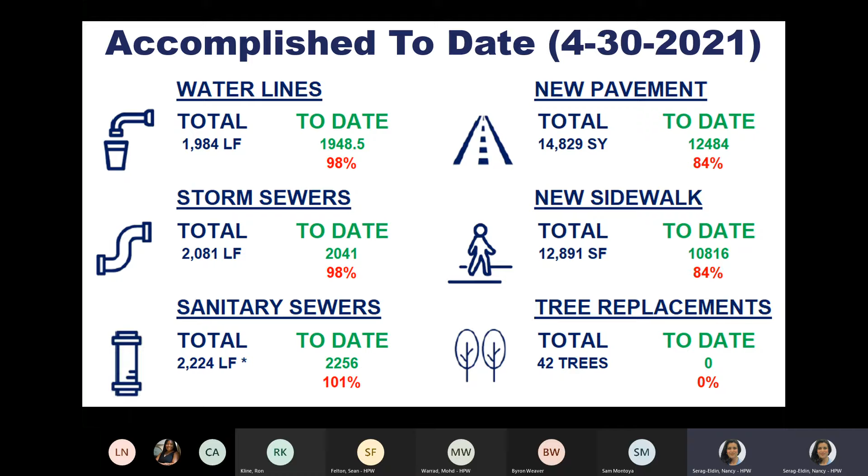As of April 30th, 98% of the water line was done, 98% of the storm sewer was done. Sanitary sewer says 101%, that's basically because we overran that pay item, but sanitary sewer I think we are done. Last weekend we installed the last bit of sanitary toward the freeway, near the crossing. New pavement, we have 84% of the new pavement complete, and 84% of the sidewalks are in, and probably next month we'll start tree replacements and sodding and such. But that's our dashboard.

Cash flow, again, big picture: to date, the total value earned is $4,972,000 out of the whole budget. That's the cumulative. And for the month of April, the value of the work that was performed was $539,000.

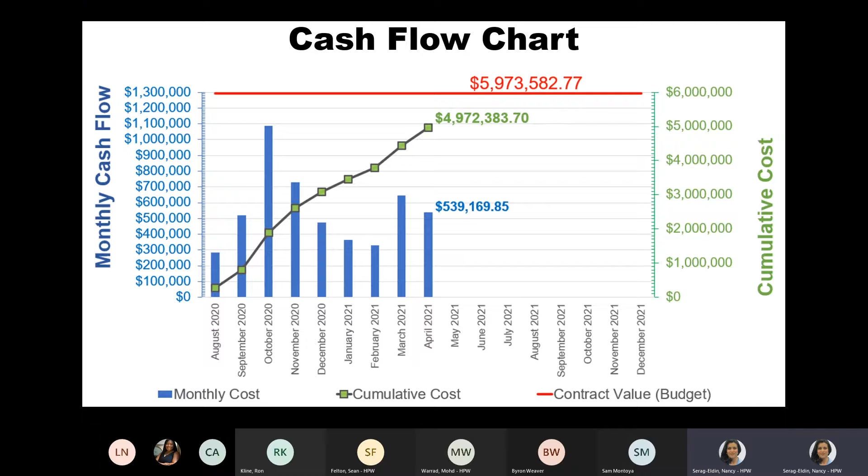In terms of schedule, our forecasted completion date is July 26th. The contractor is 123 days ahead of schedule.

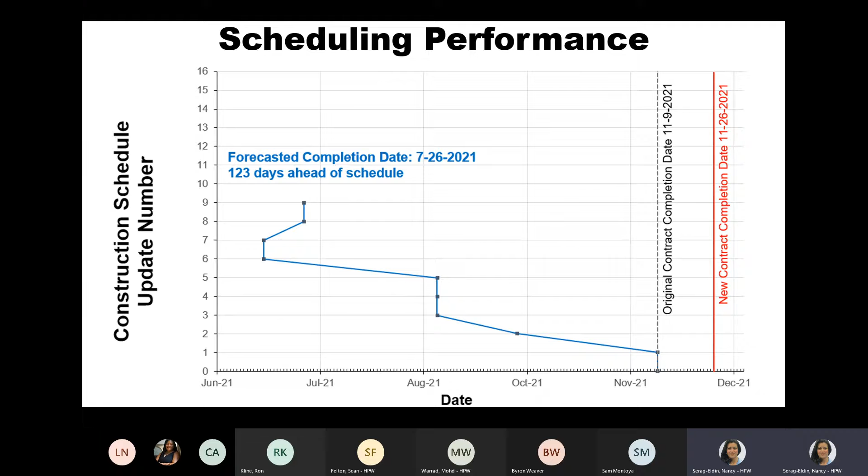We've had several change orders. The change orders listed in green have been issued, approved, and paid to the contractor, and the ones in orange are still pending. Actually, there's a few more that I need to add to this list, I just haven't sent out the RFPs yet, but I think we have 14 change orders coming or pending. Anyway, so with all the change orders that we have on the screen, the new contract amount is just over $6 million.

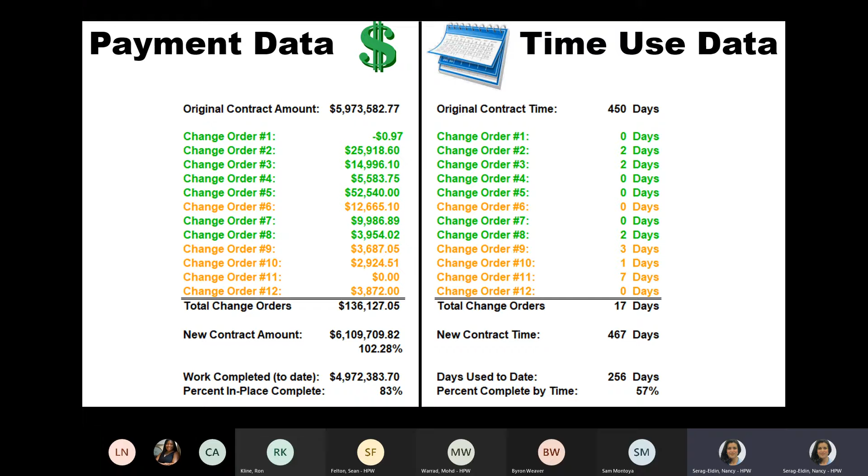If we don't deduct the pay items we're not going to use, that will come out to 102% of the budget. But when I actually did the over and under report, and deducted the things we're not going to use or the remainder of those pay items, we're actually sitting at 99% of the budget right now. So percent in place complete is 83%, percent complete by time is 57%. So good job, SER.

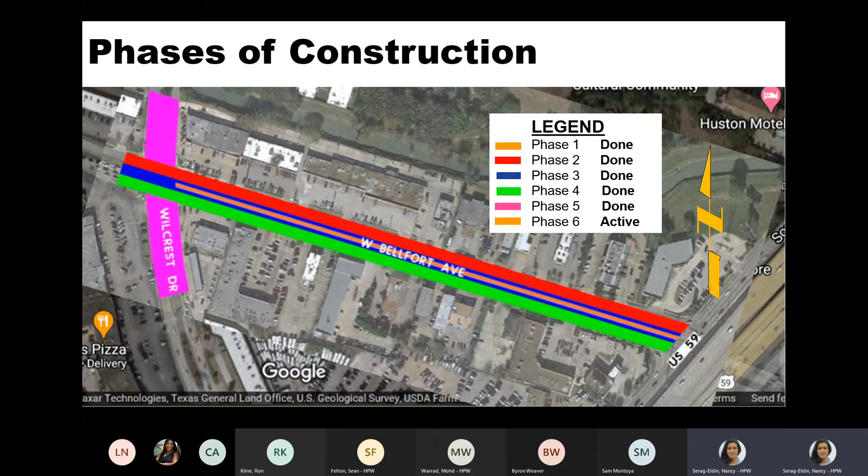Okay, here are the phases of construction. Again, all of the phases have been completed. We are now in phase 6. So here's phase 6, it jumps out at you, the median.

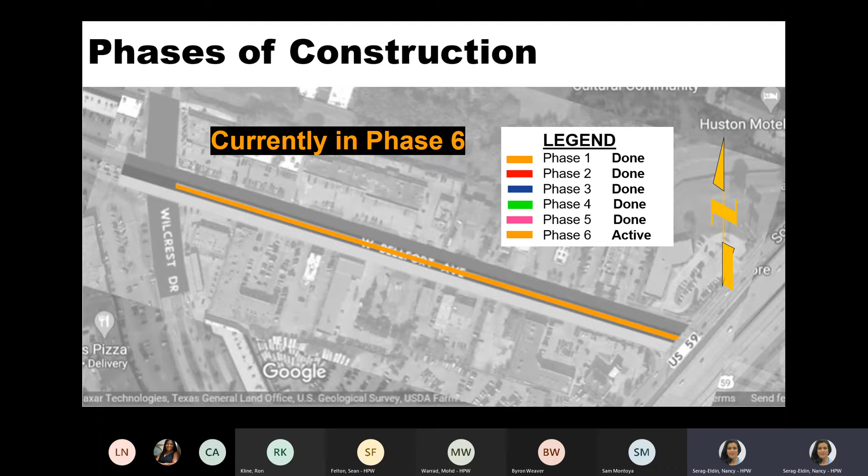Okay, so that was the progress overview. Now we can dive into the month of April specifically.

So just to review the previous action items, all the action items are done. Well, no, that's not true. Two out of 5 action items are done, and I am the guilty party for the majority of these.

I do have a question to Byron about the invoices, but I will ask you when we get to the part about the lab. Byron, are you here? Okay, good. Yes, okay. All right, so I'll ask you about it when we get later on.

So as far as the change orders, I apologize. I've prepared change order number 9, and then 10, 11, 12, and then the new ones, 13 and 14, I haven't gotten to yet. So that's on my to-do list for this week.

Also, I'm sorry Sam, I haven't really had a chance to look at the claims. I promise this week I will get that done. Okay, so it'll be on the May.

What? Nancy, what was a chance to what? Is this Byron? No, this is Sam. You said you didn't have a chance to look at what?

Oh, the claims. The 2 proposals that you sent about, there were 2 claims. One is about a reimbursement for manhole number 9 that we didn't use, and one is about the bypass, the temporary bypass for the sanitary sewer line that was damaged and backing up.

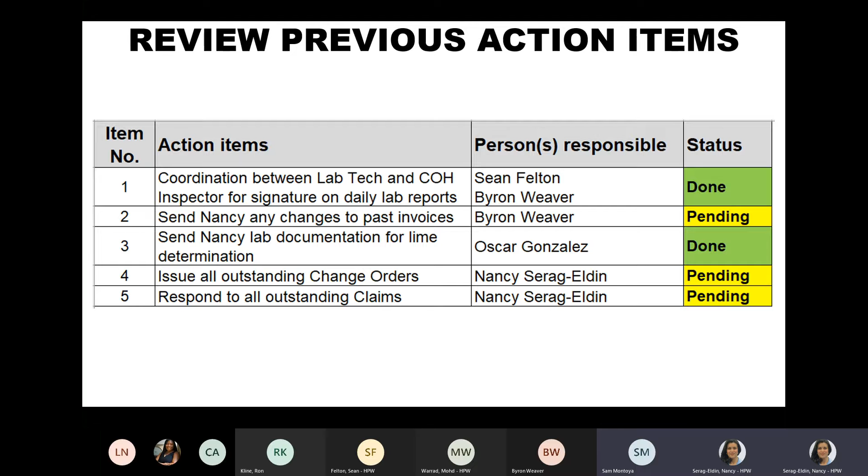Okay, yeah, okay, so I apologize. I've just been overwhelmed, but I will get to them this week, and they will be on the May pay estimate. Okay, good. All right, so moving on.

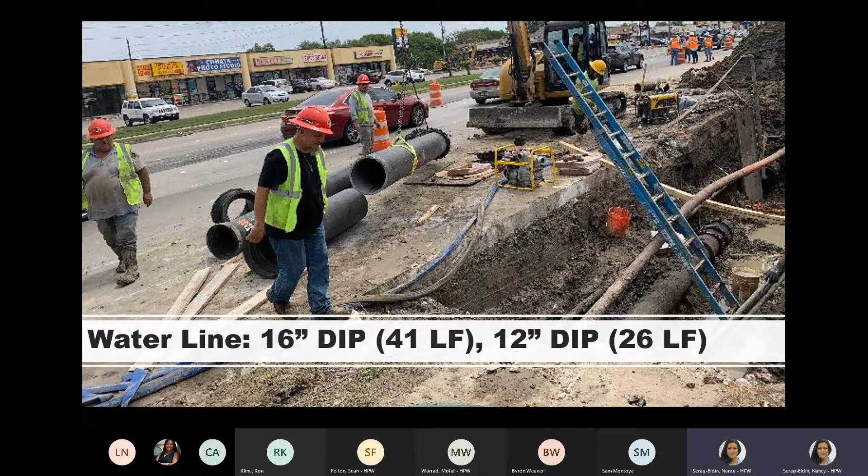So here's the progress update for everything completed during the last month. For the water line, we've pretty much finished all of the water line for Exhibit B and all the wet connections involved, and there's just Exhibit C left. So we've installed the last bit of 16-inch DIP pipe, 12-inch DIP pipe, waterline services. We had a couple of services.

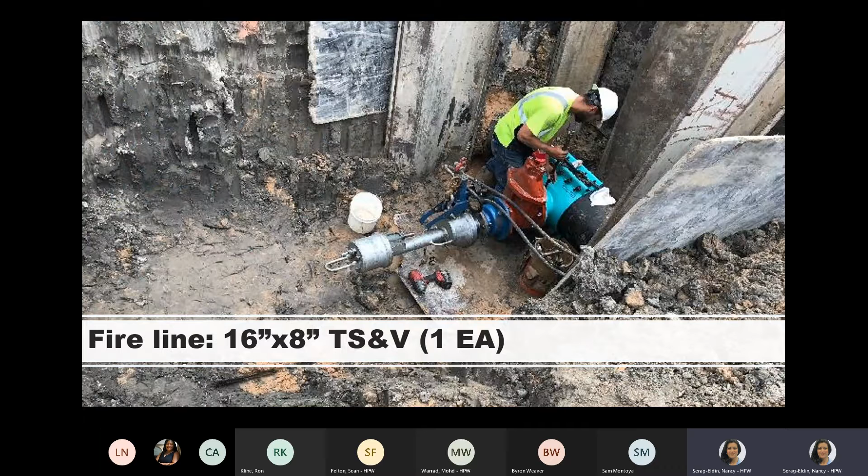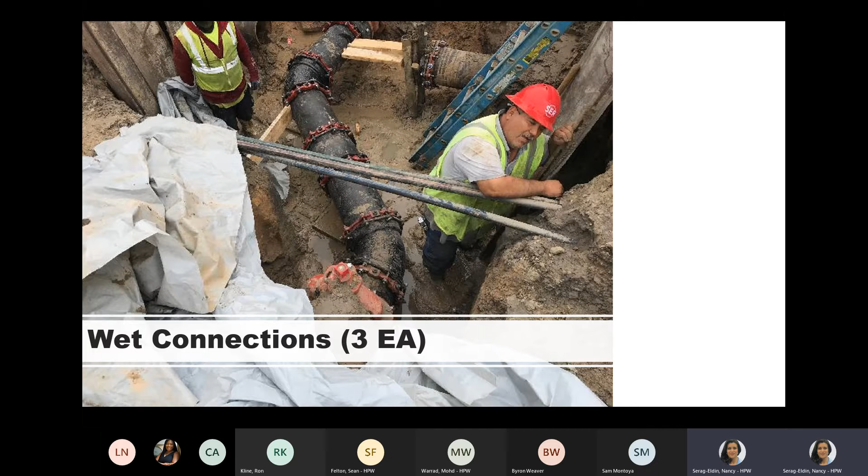We did the 16 by 8 TS&V for the fire line at Foodorama. There were 3 wet connections performed, all on the southwest corner of the intersection I think. There were 4 cut and plugs. All right, so that was for the water line.

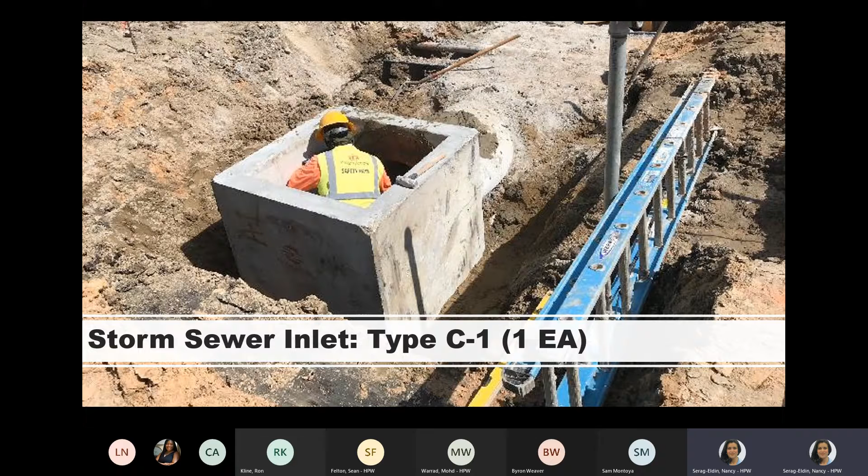And then for the storm sewer, we had 1 storm inlet. I think this is at the location where there was arch pipe. So on the west of the intersection, on the south side of West Bellfort.

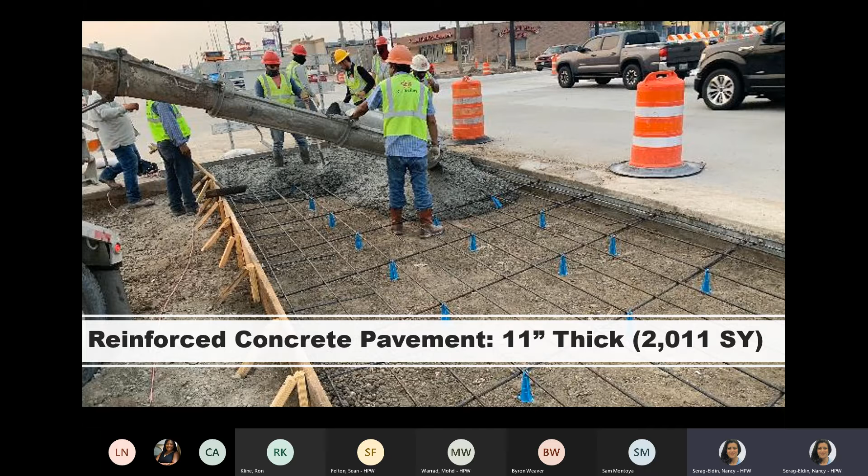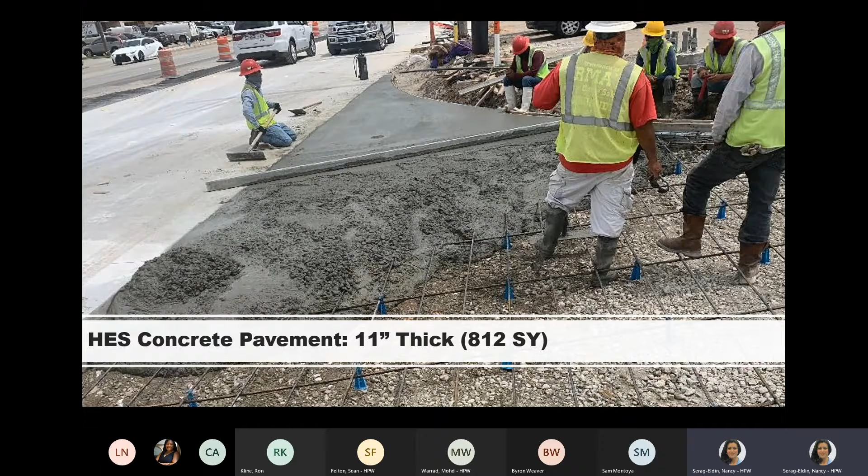And then for roadway, 56 tons of lime, reinforced concrete pavement. We finished up all of the left turn lanes and right turn lanes and everything surrounding the intersection. So we finished the concrete pour there. High early strength concrete was used for the intersection and a few other spots and the driveways, concrete driveways.

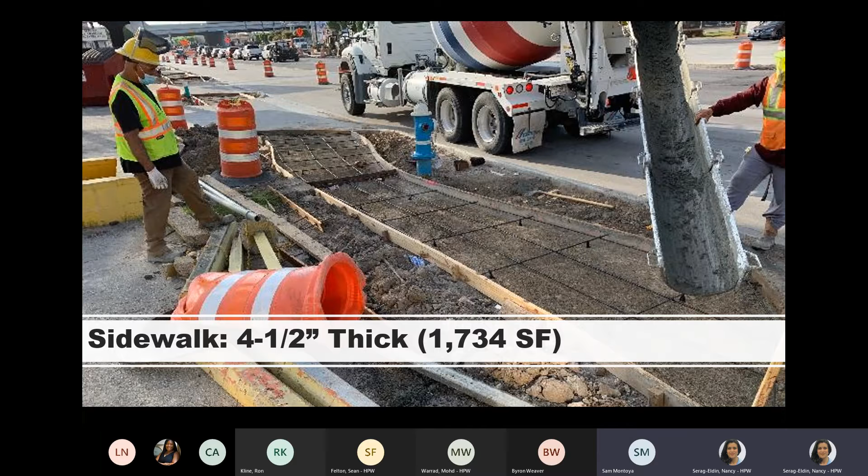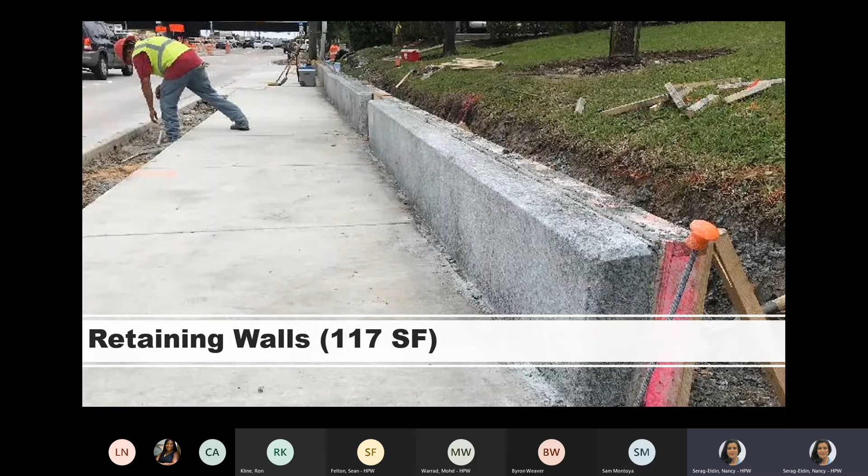Okay, also, I think pretty much all of the sidewalk is in now on the south side, except for that specialty sidewalk at the T-Mobile location. The retaining walls are all done, and where we decided to cancel the retaining wall, we ended up using sloped paving. We were just able to taper it back and do a sloped concrete pavement there.

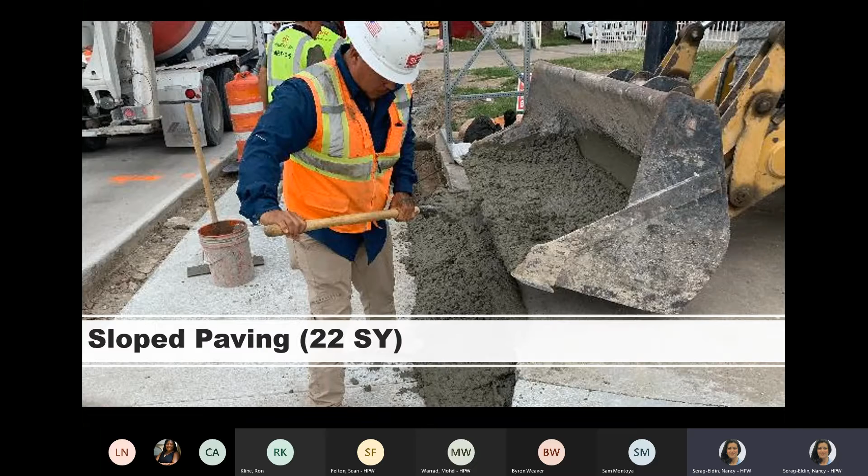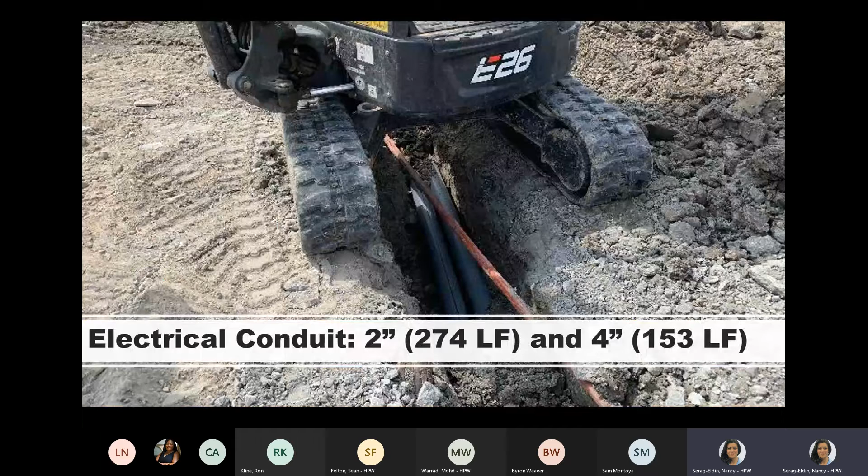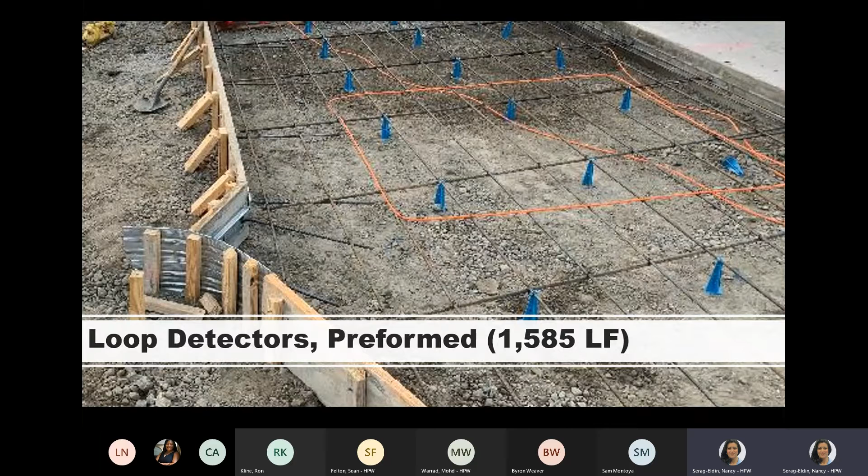For traffic, for the traffic signals, Reliable installed 2-inch and 4-inch conduit. They installed 1 pole box, preformed loop detectors, and then finally, traffic control. This is just a photo of the buttons, temporary markers located in the field, as well as the traffic control for phase 6, I believe.

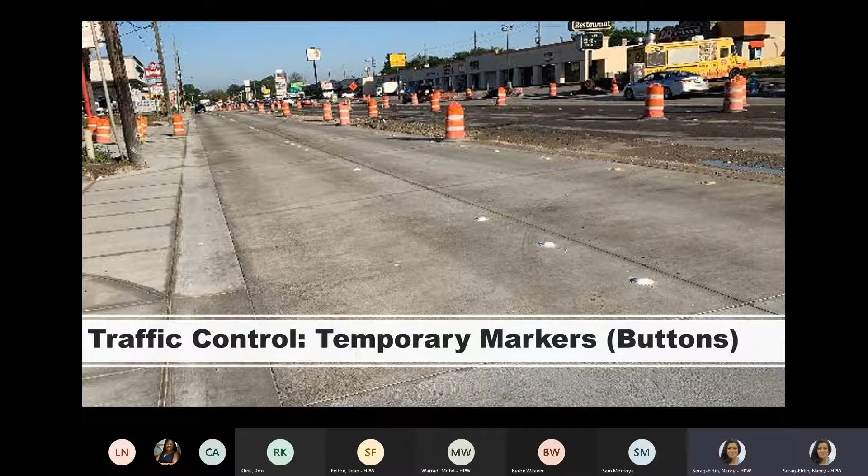All right, so that's what I have for the work completed during April. I have a few slides of issues or things that came up during April that were resolved, so I'll show those to you as well.

Sam, oh, I forgot, is Manuel on the line? Manuel is not. Oh, okay. If he was here, I was going to introduce him to the team formally to let everybody know we have a new superintendent. Okay, well that's all right, it's okay. But anyway, Sam, you can jump in if you want to add anything to these slides. I put together some slides about things that had been issues in April that were resolved.

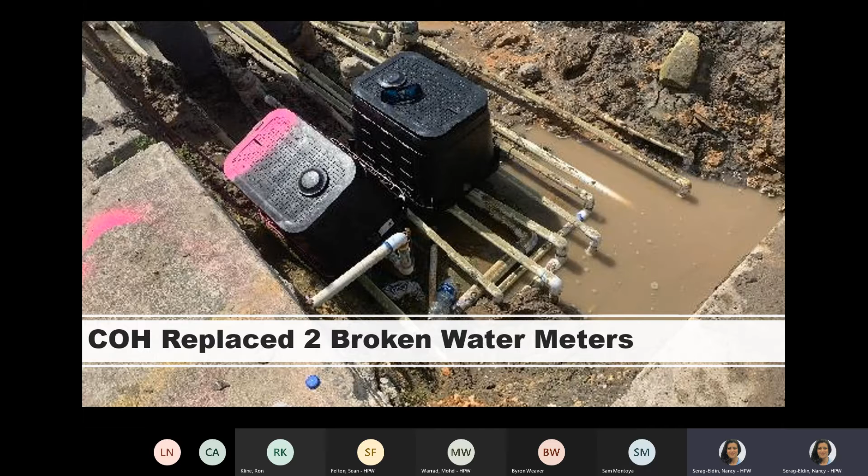There was a leak on the north side of West Bellfort, and it turns out it was due to two broken water meters. The city of Houston replaced those water meters and took care of that problem.

There was an MCI utility box that used to be in the old sidewalk, and once we widened the street it ended up being in the roadway. MCI came out and moved it back, so now it's again behind the curb. That's taken care of.

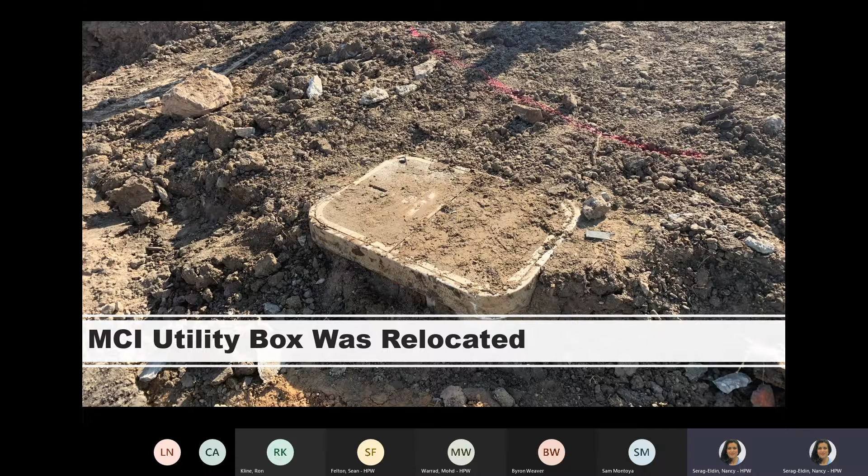There was a downed bicycle traffic signal on the job site. We don't know how it fell down, but SER was kind enough to put it back up for us, and it seems to be working. It's a solar-powered traffic signal for bicyclists.

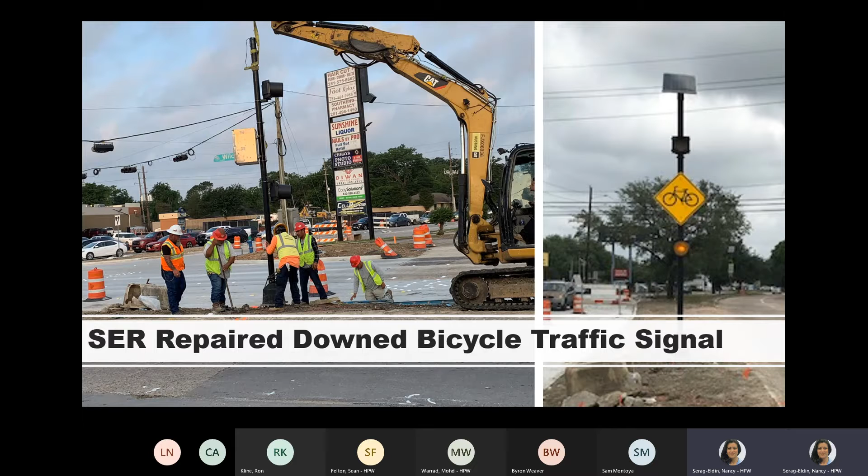There was a portion of the existing storm inlet lead that was actually arch pipe instead of round RCP. SER had to purchase specific arch pipe to fit and tie into the existing storm lead, and with the collar they were able to do that, so they took care of it.

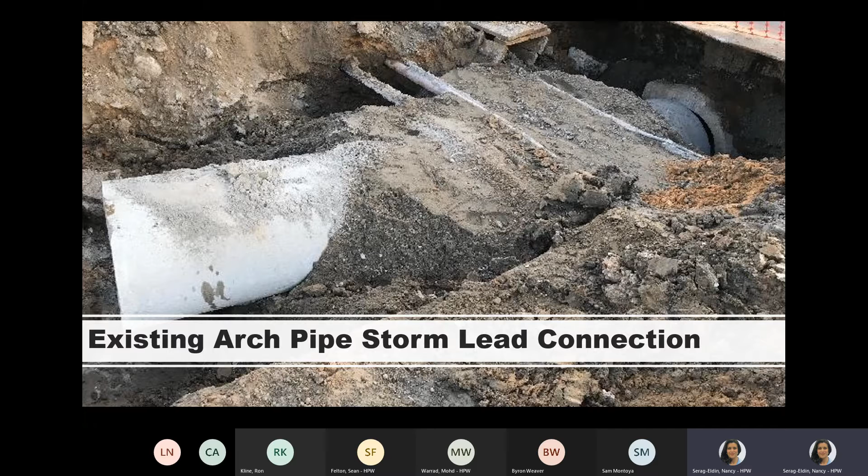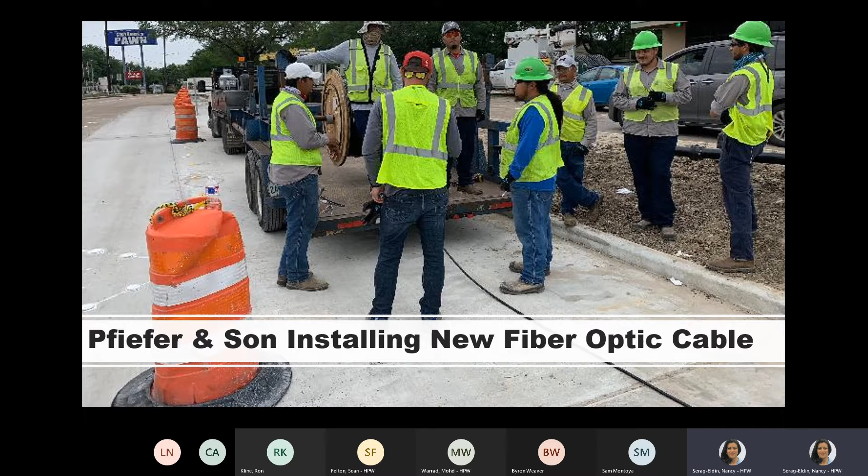And that's what I had for issues. Sam, did you want to add anything about the work completed in April or any of the issues encountered that I mentioned or might have forgotten? No, I think you covered it pretty well. I'm good. Okay, all right.

Good. All right, with that I'm going to hand it over to Sean, and you can tell us all the field events or observations for the month of April.

This actually occurred in May, but on Saturday we checked several manholes and they were halfway full of water. I was on both sides of where the dam was supposed to be, so it's making me think there's another dam placed somewhere else. I'm not sure, but I couldn't get into it because it was halfway full of water, and I don't have confined space entry training.

Okay, and that's about it for the field observations. Very good, that was an observation. Thanks, go on, sorry, go ahead.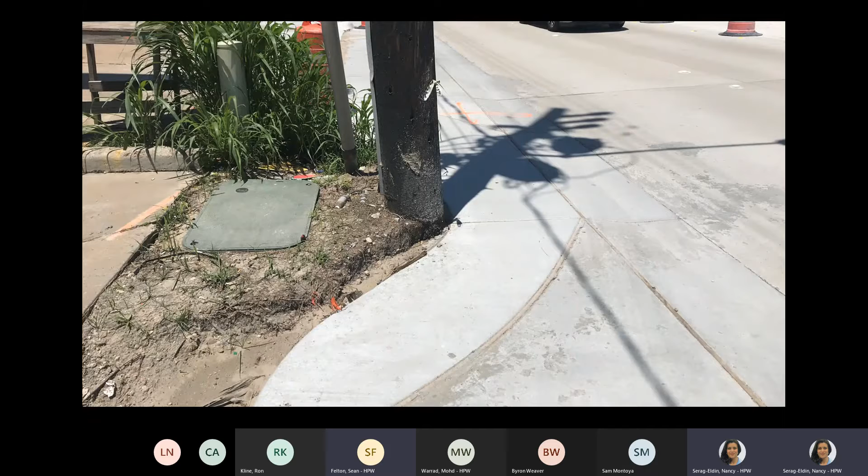I think I added a couple slides for that. No? Oh, maybe I just imagined I did. Darn it, could have sworn. Oh, it is here, but I somehow put it in the wrong place - I put it under May. Remember I told you there's April stuff and then May stuff, so I put it under May, under the upcoming slide.

Okay, but since you mentioned it Sean, let me go ahead and show it. Issues that happened in May include the sanitary manhole - it's a little high, and it messed up the sloped paving in that area. So we decided to put 3 bollards around it to prevent cars from accidentally driving over it and damaging the underside of their vehicles. I haven't sent out the RFP yet, so I'll be doing that today. All right, so that's one.

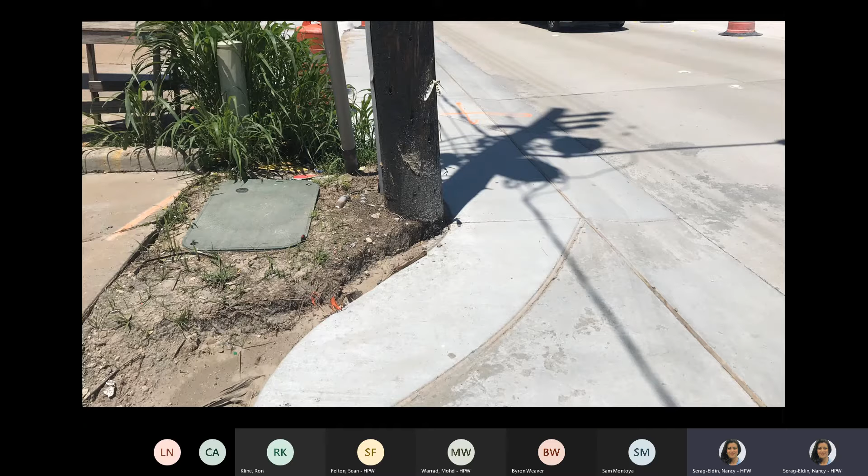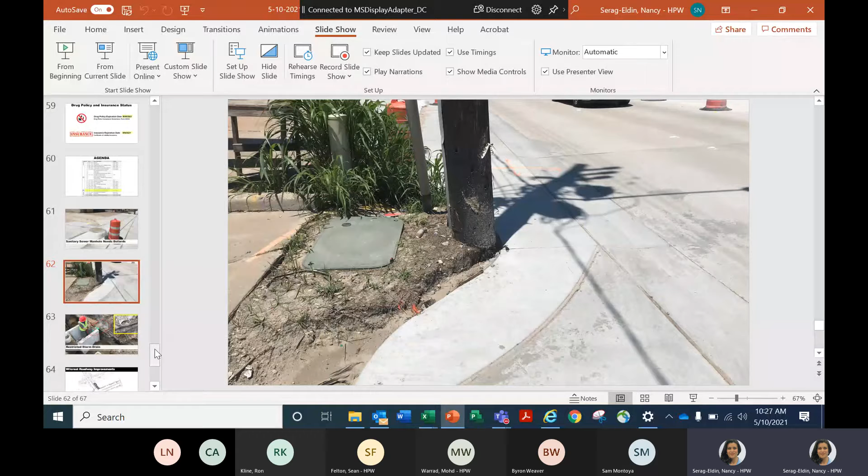And then this one is a photo of... hold on, give me one second. How do I exit out of this? Oh I know, here, okay, this thing.

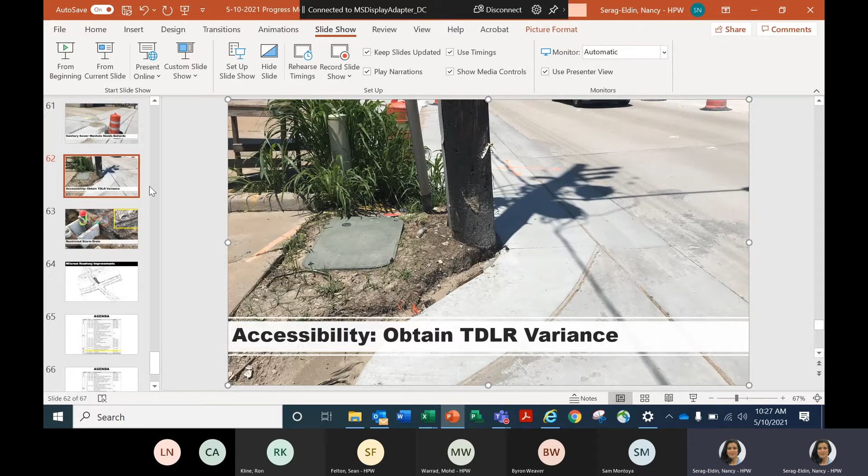Yeah, so you can see the title - this is an accessibility issue, it's called TDLR, right? TDLR might have an issue with this because it's only 33 inches and not 36. But considering that they approved these drawings before we constructed them, and they knew the location of the power poles to begin with, perhaps we can obtain a variance. I'm not familiar with this process, so if we can do that I'll get it started - I'm going to talk to Steve about it. Okay, so that was one issue.

The other issue is the restricted storm drain. The storm drain got damaged when the gas line company augured and installed their gas line, so the PVC storm drain got squished. Then we tried to connect it to the inlet using 2 pipes, and it didn't work - it restricted the flow, and even if we pulled out whatever grout or leaves got stuck in these green pipes, it's still too restrictive. We need a full 8-inch pipe to be able to drain that property properly.

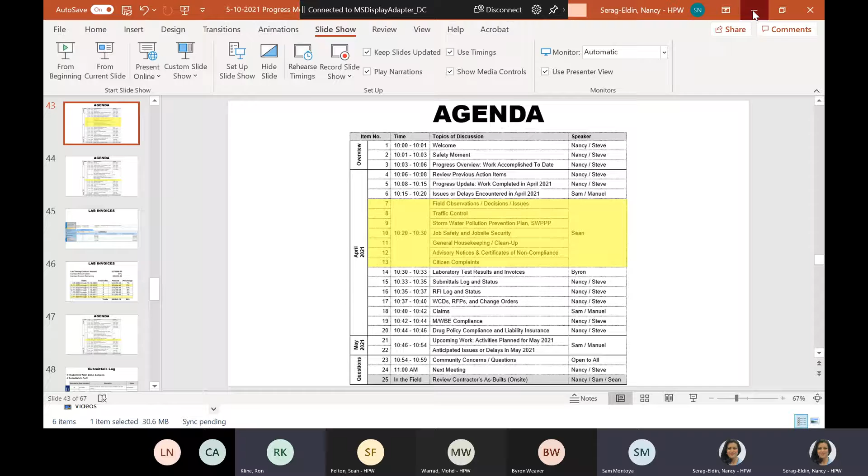You want me to open up the Fieldwire drawing? No, I need to be sure, I'll get back with you, Nancy, and let you know. I'll give you a station, I'll send you an email. Okay, sure.

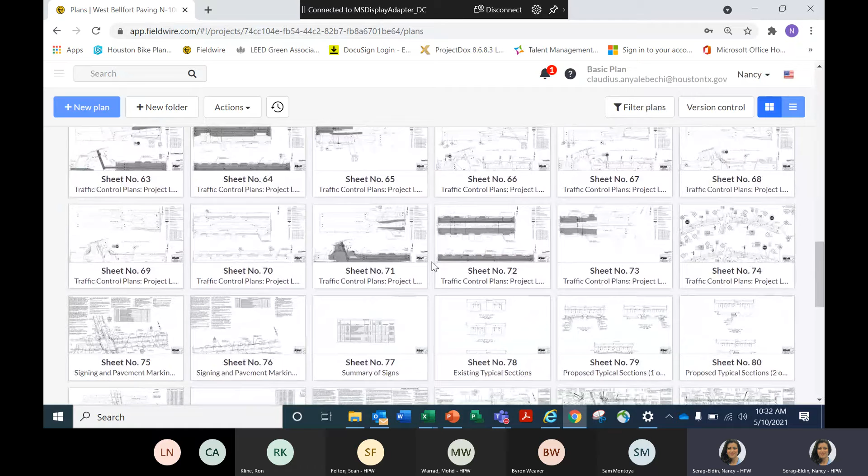That manhole is always going to have water in it unless you have a period of drought. Yeah, it's because the bayou needs to be improved, so it's a flood control issue that has a big part in that.

Steve makes a great point. He says it's a flood control issue, when Keegan's Bayou is improved so that the level of water is no longer higher than our pipe outflow. Let me see, how do I...

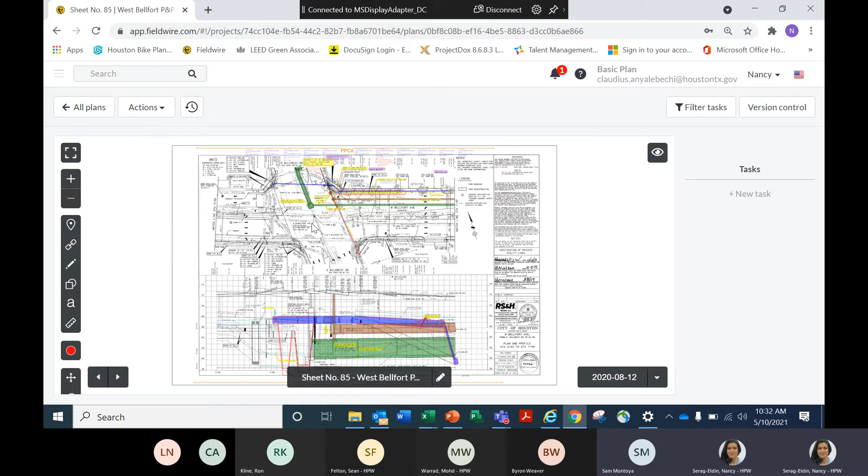Oh, that manhole right there, right? I don't have my mouse, so I'm not very familiar with this. So here's the outflow, right? There's an outflow somewhere here. Oh, here, up right there, go up, go up, right there. That's the outflow? Well, that's the manhole before you get to the outflow.

Oh, I see, okay, so there's an outflow to Keegan's Bayou, and it's backing up into our pipe, right? And then it backs up this way. Yeah, Ron, is that right? Can you verify that? Well, that's not what they're saying.

They're saying that the elevation of the water in Keegan's is higher than the elevation of our inlet, so there's going to be standing water in there at all times. To me, it's hard to believe because Keegan's is fairly low and we're a lot higher, several feet higher, which is easy to prove. You just take an elevation of the water level in Keegan's and compare that to our flow lines in our inlets.

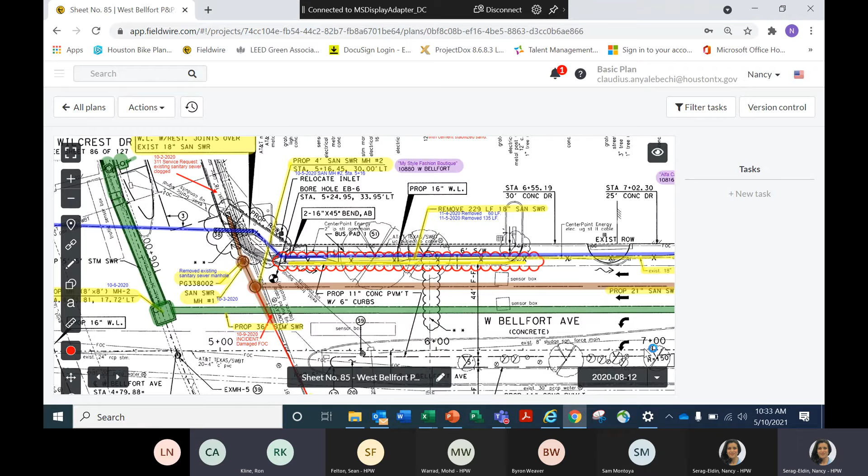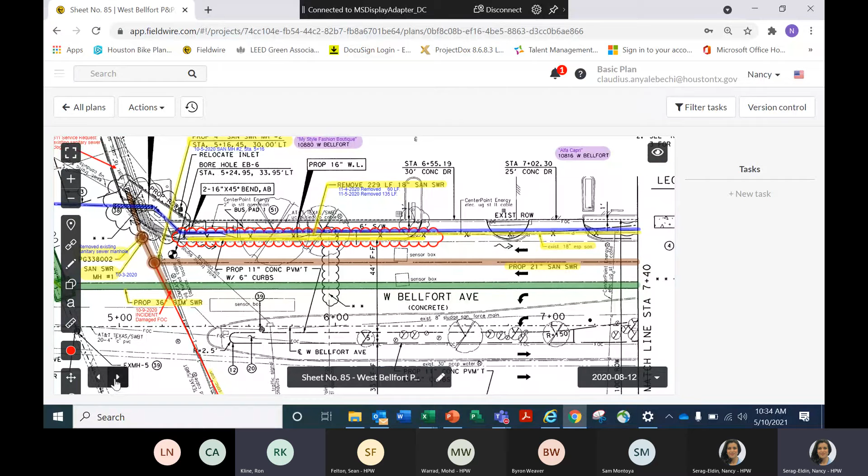But that's different from what you're talking about, Sean. When it rains, yes, it will back up the system, but only when it's raining. Well, we've had a period of pretty intense rain, Ron. I think if it stops raining for a week or two, it'll show that the water surface elevation in the bayou should be lower.

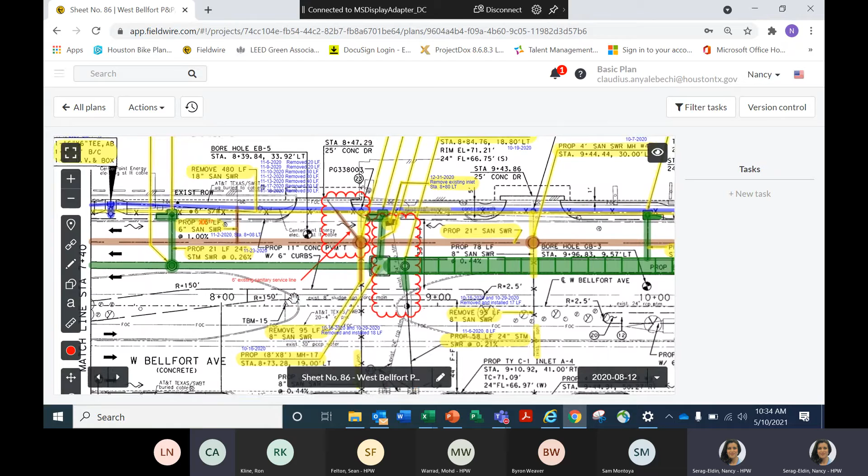You're absolutely right, but I think the bayou is kind of inundated with storm water. If we have a pretty heavy rain, it is going to back up the system. As Keegan's fills up, it's going to come up our system, but then conversely, as it goes down, it's going to leave our system. It should leave our system.

And when Keegan's gets back to its lowest level, there shouldn't be anything on our system. I agree, it all should flow. I think we just need to wait for that, because I'm not quite sure we're there yet with all the rain we've had.

What rain? The rain we had last Friday? Yeah, that'll be gone. It's easy to go out and look at Keegan's to see how low it is. I go across White Oak Bayou every day and it's down to normal. Keegan's should be the same thing.

So Sean, did you say there was water in the manhole? This manhole? Which manhole, or are you talking about the inlet? There were several manholes we popped, one right here, one right here, this one here. Oh, but I can't see what you're pointing at. Oh, the one near station 8+00, 7+60 about. Here, this one? Yeah, okay, good.

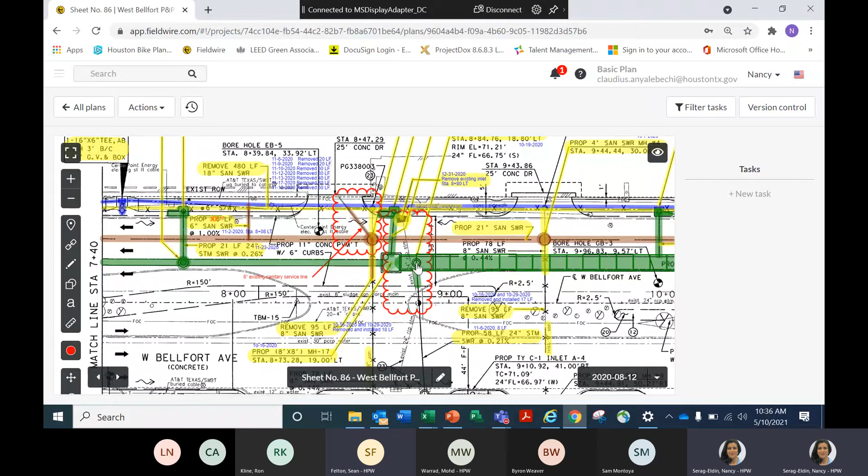Okay, so here, and that manhole to the east is also high.

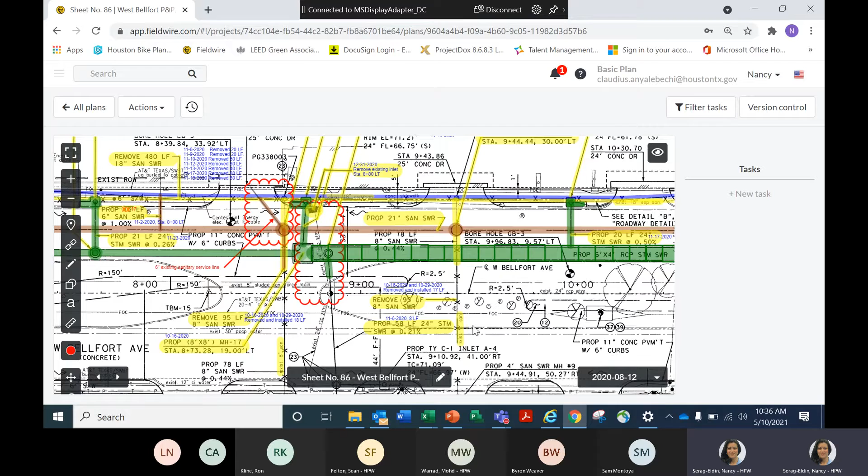Yes, okay good. So we had at least one brick dam here. So wherever the other one was, at some point we need to figure out how feasible it is to find somebody with confined space training to go in and look, or if it's too much hassle, maybe we can video it.

Or maybe the video won't work because there's water in it. I don't know, Nancy, it's still in there. We need to remove it. Do you know where it is? Yeah, it was where you said it is. The dam is right there at the end. Oh, there isn't more than one? Just the one, to my knowledge it's only one.

Okay, all right, so maybe we can get an ETA on when we think that will be removed, because we're pretty much done with all the utilities. Yeah, we could do that, and I'll get that, I'll make that happen. Thanks, Sam. Yeah, ask Manuel when, and let me know.

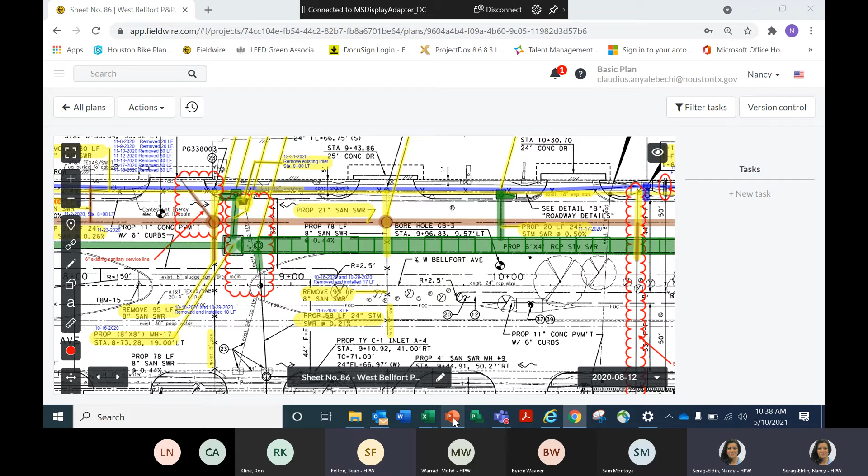Okay, that's good, let's go back to this. Is that it, Sean? Did you want to add anything else? I don't know if it's in the budget, but sometimes we TV the storm sewer and sanitary, so I don't think a pay item exists for it. It has to be done, and we plan to do that.

Hey, is it typical that we TV storm sewers or just the sanitary sewers? We do both. Oh good, I didn't know, okay that's great. Cool.

All right, excellent, okay, I'm gonna move on unless anyone has any final comments. I'm gonna move on to the lab.

All right, okay, so Byron, here's the question I had for you. I finally was able to figure out how to check the CIPMS for your invoices, so I don't have to keep harassing you every month. So, here's the West Bellfort project for the testing.

Here's all the testing invoices from the lab. These are the values that I have on my next slide. However, I noticed there is one that's missing. We have an invoice for 10/10, 12/10, 1/10, 2/10, 3/10, but there's nothing for 11/10. This number, I think I got it directly from you, but it's not in our system. This value for 11/10 is 20,000.

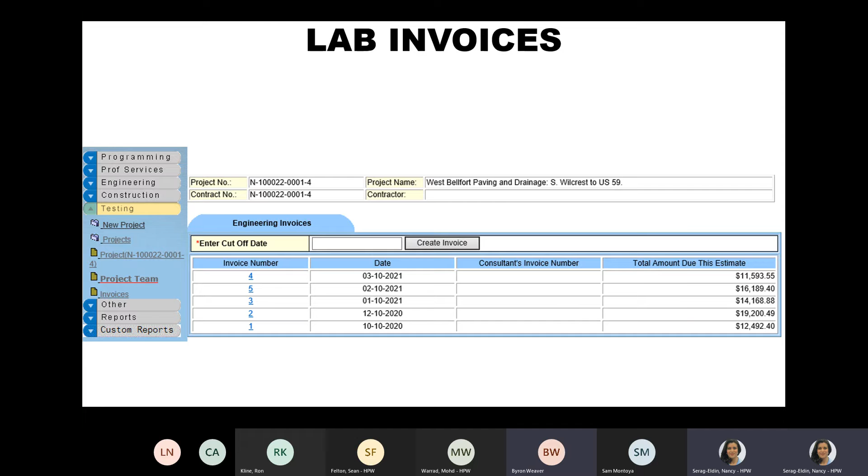She should have it. I will get with them today and find out what the situation is. Yes please, get with Gaju Patel and find out why that invoice isn't in the system. Is the value that I have correct? I believe so.

Or we can do this offline, I'll talk to you after, or we can email each other. But I just wanted to ask you if this value I have was accurate. So maybe after the meeting you can check your values, and then you'll need to get with Gaju Patel and find out why that invoice is missing.

Also, the invoice for 4/10 hasn't been uploaded. Have you sent in that invoice? No. Oh, well okay then. Yeah, my project coordinator quit this week from doing invoicing, and by the time I've gotten through all the paperwork, found the missing paperwork, and last Friday we got Sean to sign some missing documents, so that invoice will actually not go out until today.

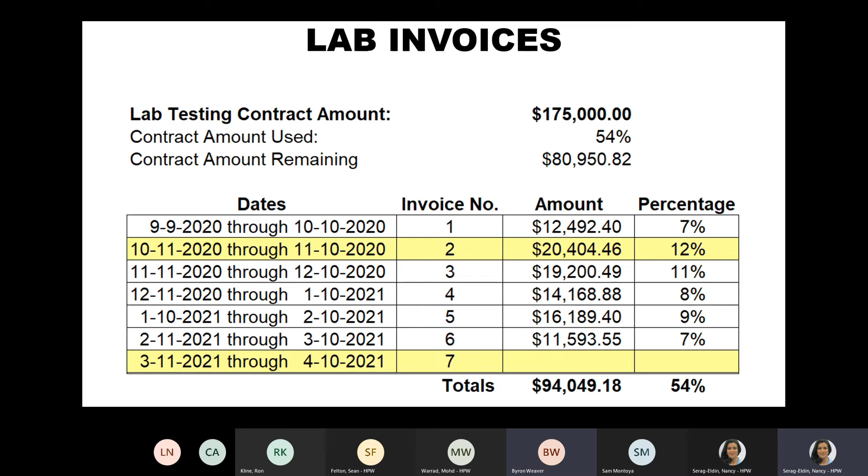Okay, that's not terrible news, it's all right, it happens. Well, thanks, Byron, anything else? No, that's all I have this morning. All right, terrific, thank you.

Okay, we'll just move on to submittals. So we have 54 submittals in total, there were 2 submittals in April. I don't think there's anything really to say, everything's fine with the status of the submittals.

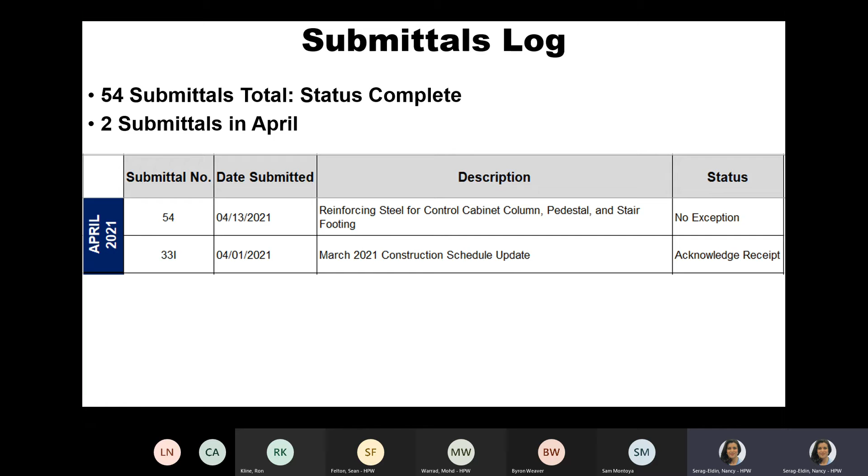For RFIs, we have 29 RFIs in total as of yesterday, but I'm going to add one today. There was one RFI submitted in April about the 8-inch fire line in front of Foodarama. And we're already in May, so I'll mention it - there was another RFI regarding Reliable's conduit not connecting in the middle of the intersection, so there's going to be a small bit of rework to allow them to connect their conduit. That was RFI number 29.

And I'll be submitting an RFI about the drain at the car shop that we talked about earlier. Mohammed Warrad, if you can hear me, I'm not able to send the RFI myself, so I'm going to get with you so you can upload it. I'm here, I'll take care of it. Oh, thank you, okay, I'll write it up for you, you just have to upload it for me. Thank you, appreciate it.

All right, super. RFI 29 on my end is still not released, although we've resolved the issue, I guess Ron can't respond to it because it's not released. Which one's that, Sam? 29.

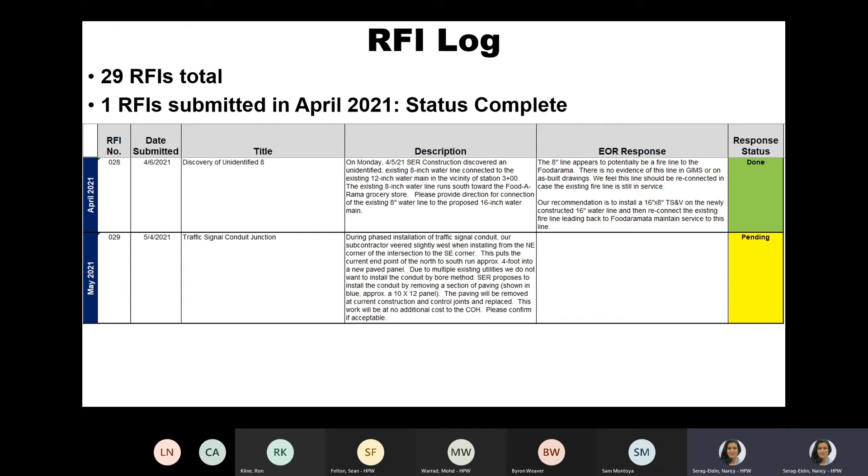Thanks, okay, so that's good. Can't remember where that was. All right, so moving on - was there anything you wanted to say about any other RFIs? I think we're okay, we're okay.

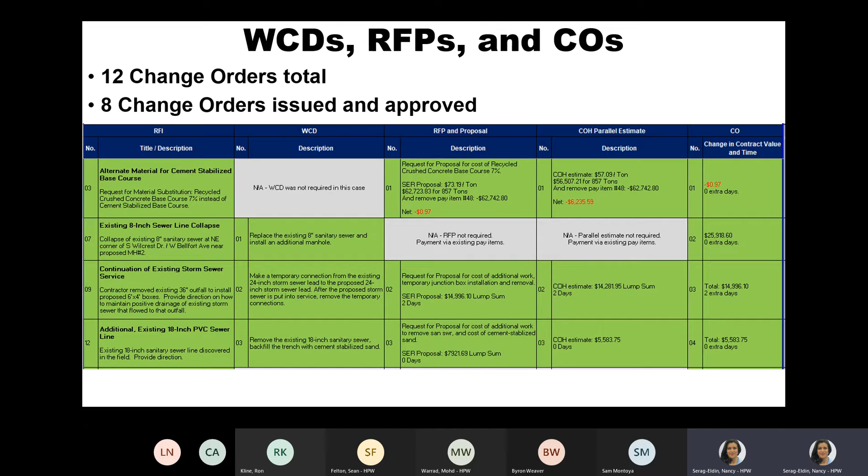Okay, work change directives. It says 12 change orders total, but I think at this point it's actually going to be like 14. 8 change orders have been issued and approved. That's sort of true - number 6 got held back, so we didn't actually issue number 6 yet, but it's okay, we'll get there.

Okay, claims. Yes, I'm sorry, Sam. I don't have the claims done, so I'm working on that this week.

Okay, MWBE. For the month of April, or as of the month of April, the contractor has paid just a little over $1 million to all the subcontractors who are MWBE compliant, and so we've reached 17% of the original contract value. Our goal is 18% of the contract value, so we're 95% of the way there.

Drug policy and insurance, liability insurance - they're all up to date.

So now we can talk about plans for May and upcoming work for May. We've already kind of discussed a little bit the anticipated issues for May. But Sam, do you want to give us a summary of what we expect for May?

Well, everybody knows we're in phase 6. That will continue - we hope to get a lot done in May. A lot of the other work happening is from Reliable Signal, doing the poles, the controller box, the platform for the controller box. There's some sidewalk and retaining walls to also be done.

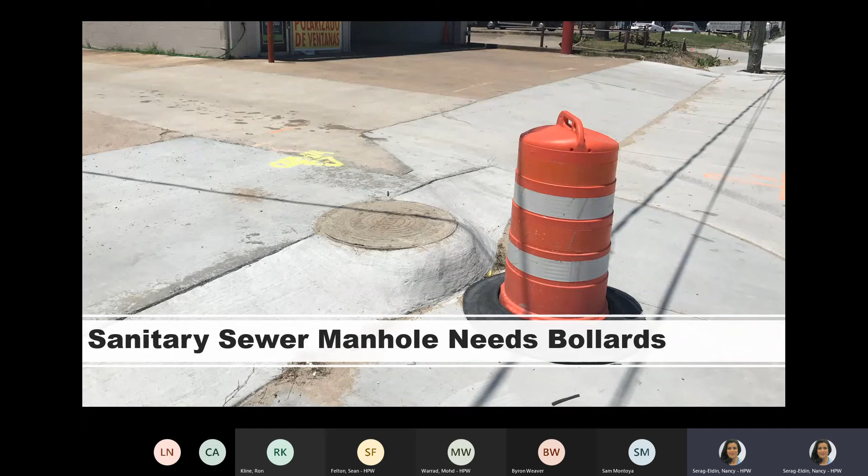All right, I've already shown you these pictures, so I'll submit an RFP for this. I will talk to Steve about how to handle this situation, and if there are any other locations that are also less than 36 inches wide, let me know - if Manuel or Sean or whoever discovers any, let me know. I don't think we will need a variance - I think you can go down to 28 inches at a point. I'll pull that, but we will not get a variance from TDLR.

I guarantee you that - I've never in my career been able to get a variance from TDLR. You're lucky to get a response. You're exactly right, Steve. But I don't think - when we looked it up, you can go down to 28 inches at a spot. He's right. Yeah, okay, 28 inches, right.

Hey Ron, where do you get these regulations? Do they have a spec book, or is it on their website? Where is this written down? Yeah, just go to TDLR or look up ADA. But where do I get it? I go to my TDLR expert, I say hey, give me the...

Oh okay, good to know. All right, but yeah, it should be on TDLR's website. I know they have everything, but it's hard to navigate through their website. Yeah, okay, I'll take a look. All right, 28 inches at a point. Okay, good, next.

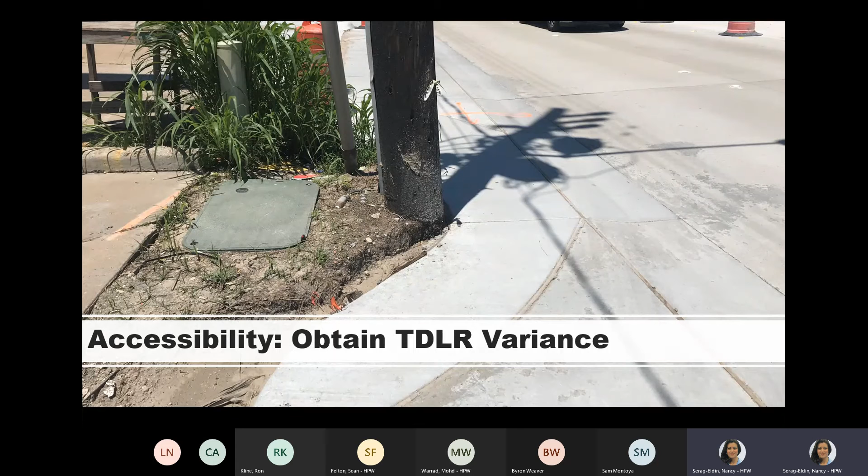Okay, so let me zoom in here. All right, so this is the intersection, right? We were out there last week on May 5th for our monthly site walk, and we looked at the condition of the roadway at Willcrest, and it's really deteriorated. Lots of asphalt patches and potholes, and it's very bumpy. Compared to the new concrete pavement that's in the intersection, it's just an eyesore.

So because we have enough in our budget to cover this, we would like to add this to the scope of work. So, Ron, I wanted to ask you, is this area correct, or did I miss something? I measured 138 feet from here to here before the driveway, just like you mentioned, and he said one driveway would need to be replaced.

This driveway is going to be closed, the one right here. Now, wait, let me use my laser pointer. Okay. Oh, I can't do that? Oh, never mind. Nancy, well, anyway, that looks great. That's exactly right, okay. Got it. So this is the area that we're talking about.

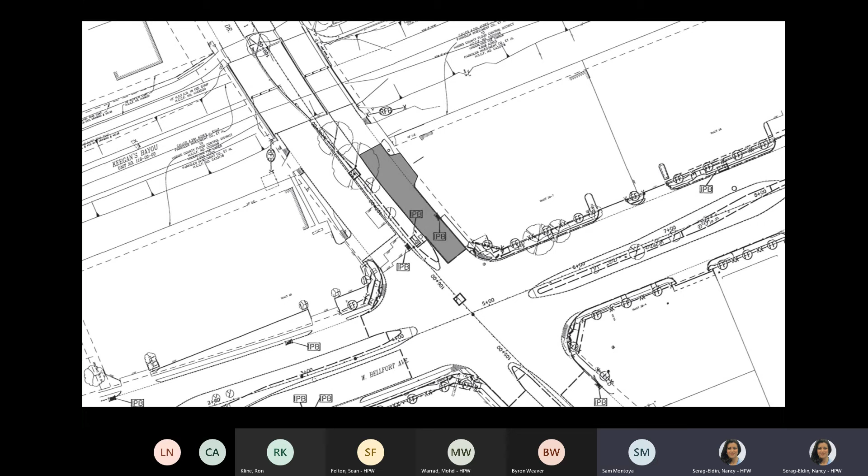Okay, all right. So I'm going to give SER an RFP today, and hopefully they'll have a proposal ready for us maybe by next week or something. So anyway, just wanted to say those were the improvements that we wanted to add to this project. It makes sense to do it while we're here.

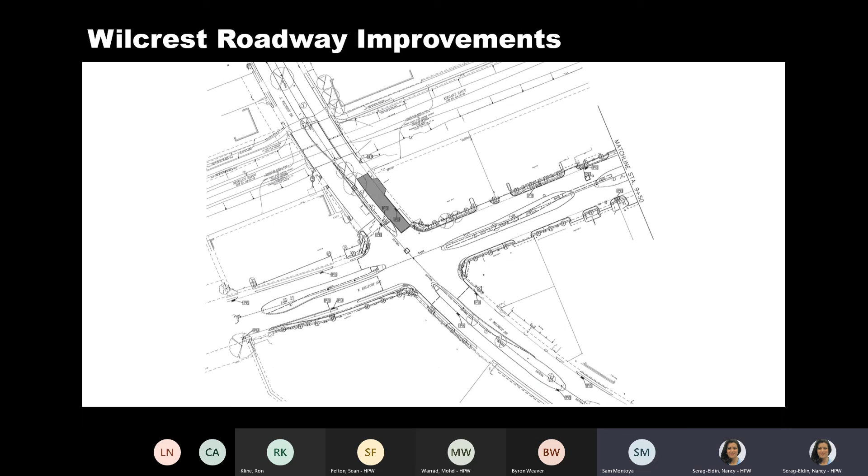Anyway, Sam, did you want to say anything about this, or are we good? I'm good for now. When I get the RFP, if I have any questions, I'll get with you. Okay, that sounds good. All right, that's it. And now it's open for questions.

I did want to say, District F joined us last week for the site visit. It was lovely having the council member attend one of our site walks. She is such a sweet lady, and we really enjoyed having her. I hope she can come out again.

I guess, thank you, I'm just Nancy. Thank you, Nancy, and everyone on the team. I just want to say, Councilmember Thomas was supremely appreciative of you guys making time to give her that tour, and she's super happy with the progress and the updates that you guys are giving us. Yeah, we just want to say thank you. Thank you, Long. Yeah, it was great having you guys.

Hey, I am curious about the newsletter and the pictures that you guys post about our project. So if you can share, that would be fun. I believe it was sent to, at the very least, you, Nancy, the newsletter last Thursday. If you didn't get it, I can send it to you. Oh, last Thursday, around 5 o'clock? Yes. Okay, I will look for it. If I don't find it, I'll let you know, and then maybe we can resend it. But yeah, 5 o'clock Thursday. I'll look for it. Sometimes I get so many emails that I'll totally miss something, and then like 2 weeks later, I'm searching a person's name, and I'm like, oh my God, I didn't answer this person. But it happens anyway, sorry.

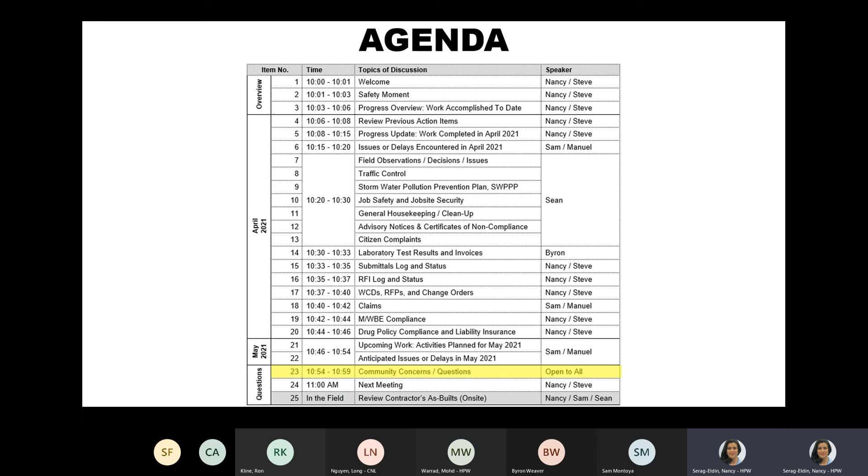Nancy? Yeah. And Sean, if you're there, I'll plan to go out this week and get with you, Sean, and make sure that we're up to date on as-built and see if you have anything you want to add, but I'll get with you. Yeah, we do need to do that. Okay.

Just let me know when. I'm good on any day except Thursday afternoon. Actually, Thursday, let's not do Thursday. Any other time is good. Okay, all right, very cool, very cool. Let's see.